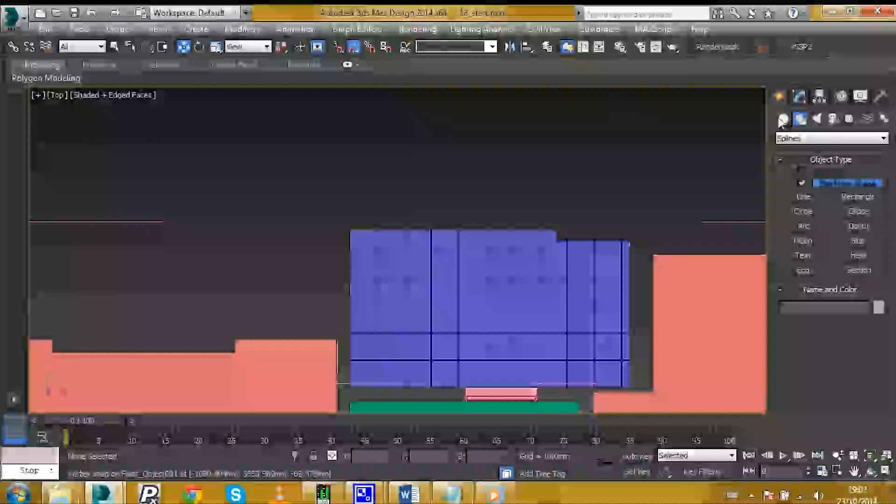So we'll start off by creating a box. So I'll just create a box in here, around about 670 in length, maybe about 1.5 meters in width, and we'll make it about 900 in height. Something like that.

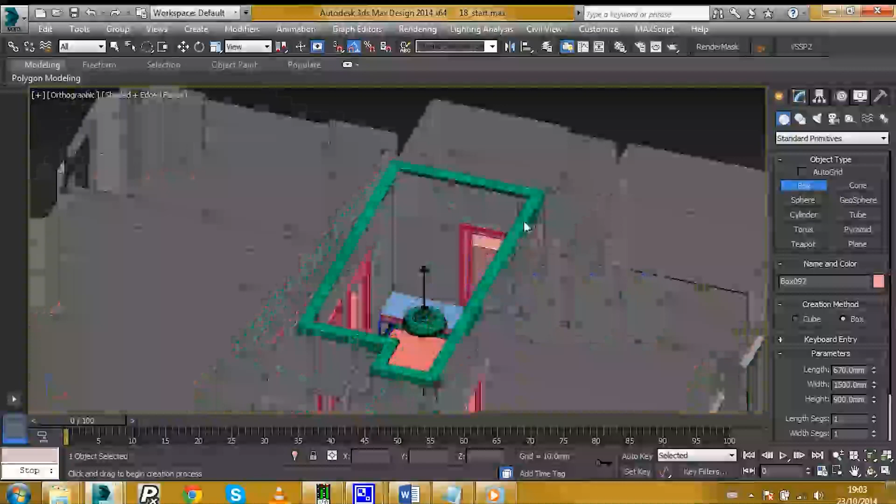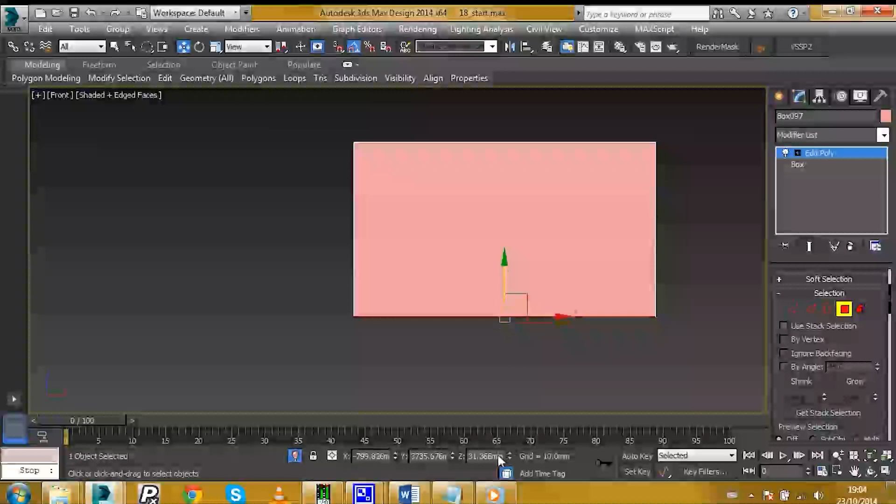So we'll just isolate this, and we'll apply an edit poly, and select polygon. I'm just going to select the bottom face, and we're just going to move this up around 100. We'll do the same with the top face. Just pull that down about 100 as well.

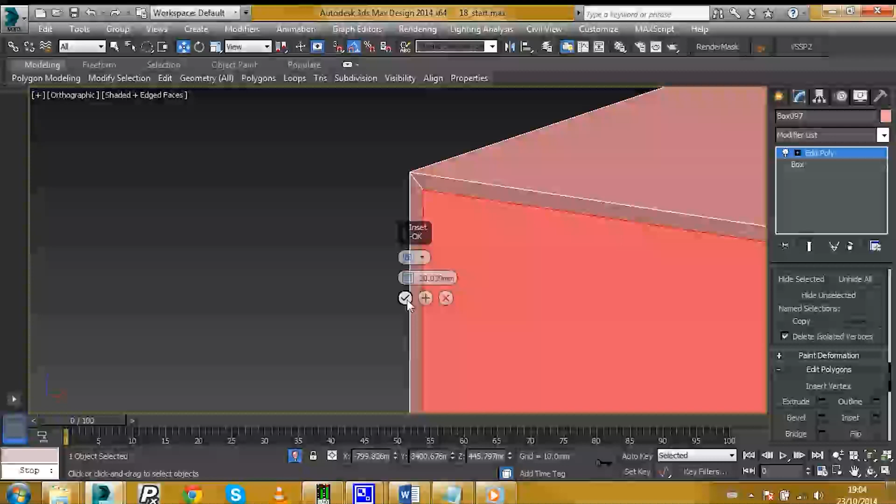On the front face here, if you select this and go to Inset, we'll just inset around 20mm. And if you go to Extrude, we'll extrude this back. Something like this, 600, round about there, will be okay.

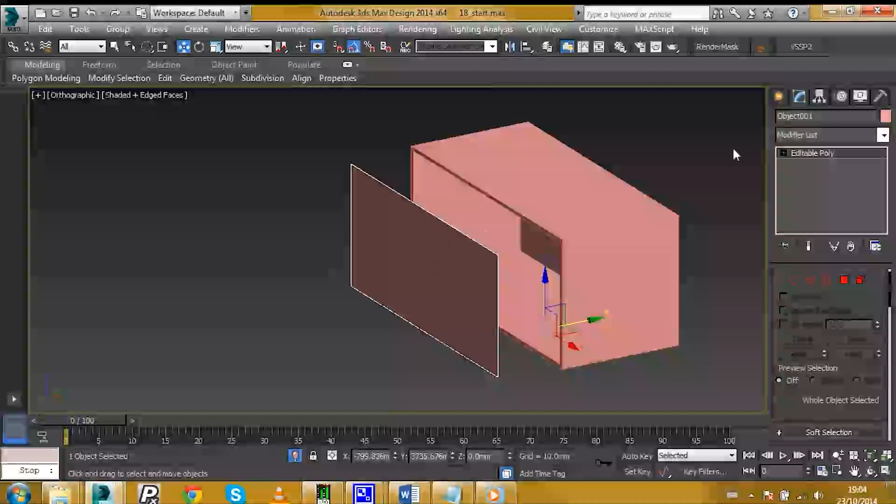So now with this face selected, just shift and drag on the Y-axis to detach it, so clone to object. We'll just select this shape, put the pivot to the centre, hierarchy, affect pivot only, center to object. And under the edit poly, select edge. We'll select the two horizontal edges, and we'll go down to connect.

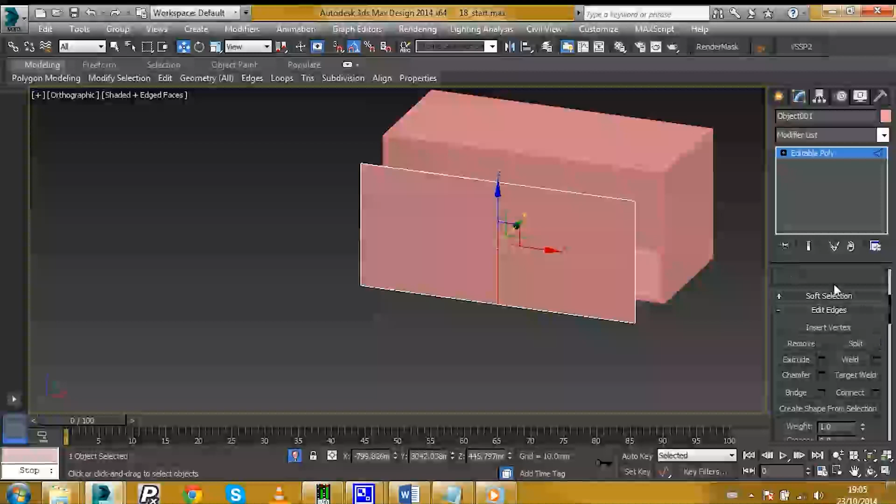We also want to go back to our polygon selection, and with the two faces selected here, go to Inset. At the top here, go to by polygon. So we're going to inset these by polygon. We'll just inset these something around 10 to 12mm.

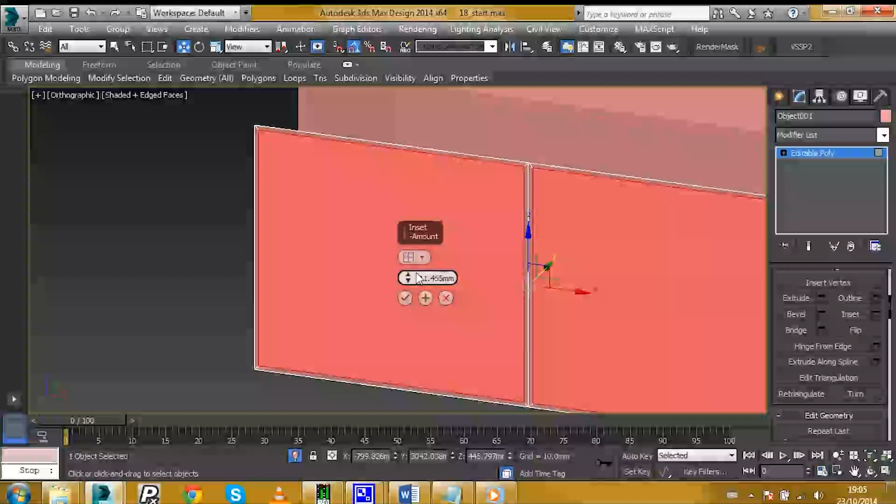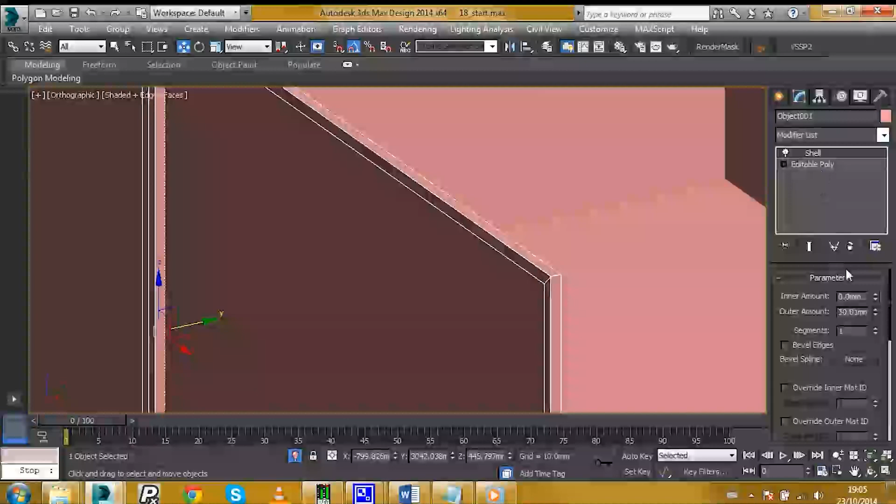And I'm just going to detach these two faces. So edit poly down to detach. Detach them, like so. So with these still selected, we will apply a shell modifier. And we'll just shell these on the outer amount, about 20mm. Like so. That's okay.

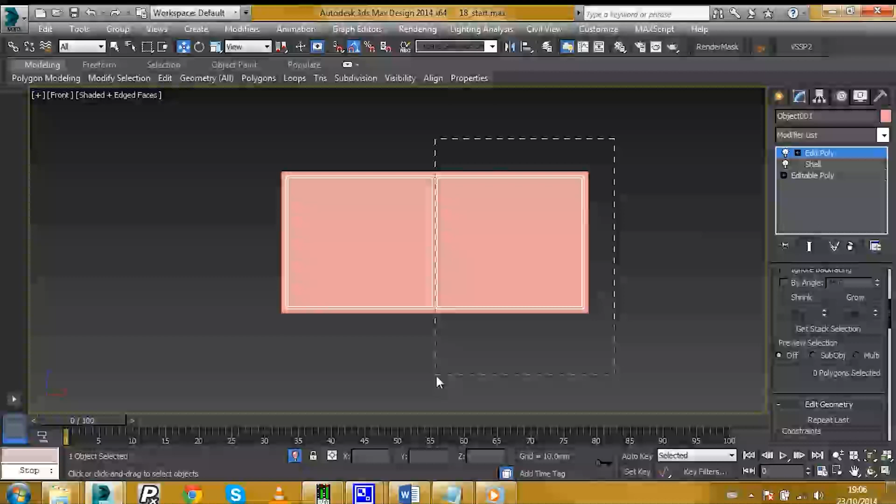So we'll apply an edit poly again. And in your front viewport, I'm going to select half of this. Like so. And just detach this as well. So if you select this object, and we'll put the pivot to the centre, and we'll just move it out of the way.

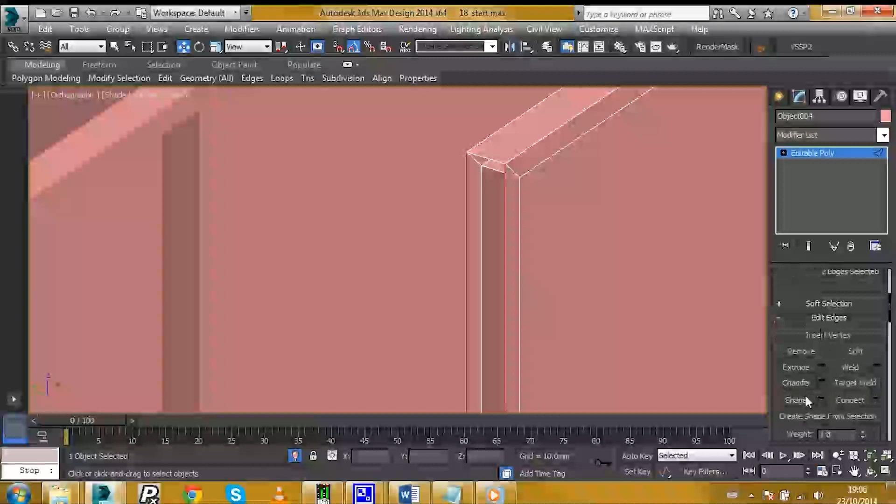We'll be missing a face here, but if we go back to edit poly, we can just bridge these across. So select the two edges and down to bridge. We'll have to do the same on the other piece of geometry. Select the two edges and just hit bridge.

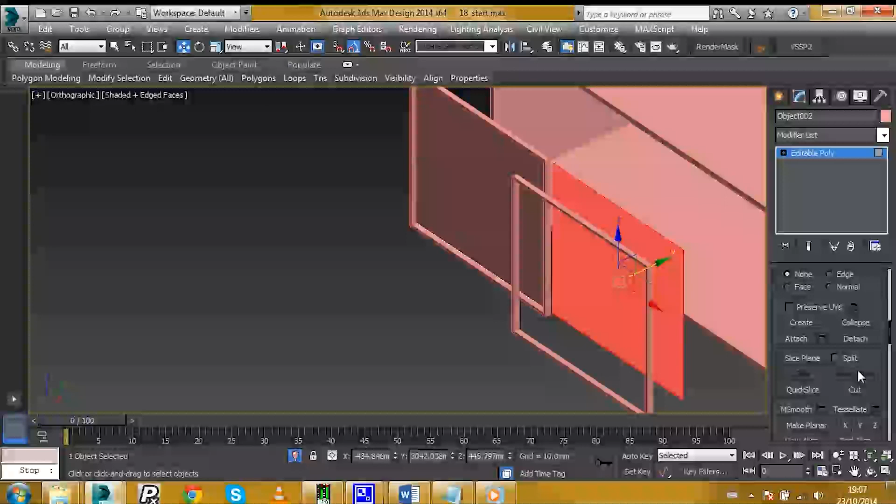So now with these two shapes that we detached earlier, we just want to detach this one. And we'll just move this into the centre of this piece of geometry. And we'll do the exact same with this one. These will be our doors for the cabinet.

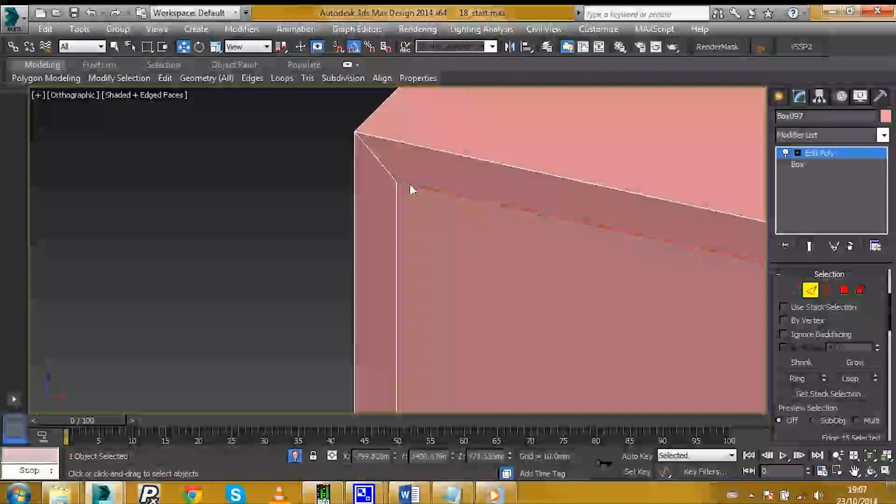So back to the cabinet, just going to chamfer some edges here. So on the inner edge here, we'll just loop our edge selection round, so all the edges are selected, and just chamfer this. 1.5mm is okay. And we'll just do the same on this edge too. So go to chamfer.

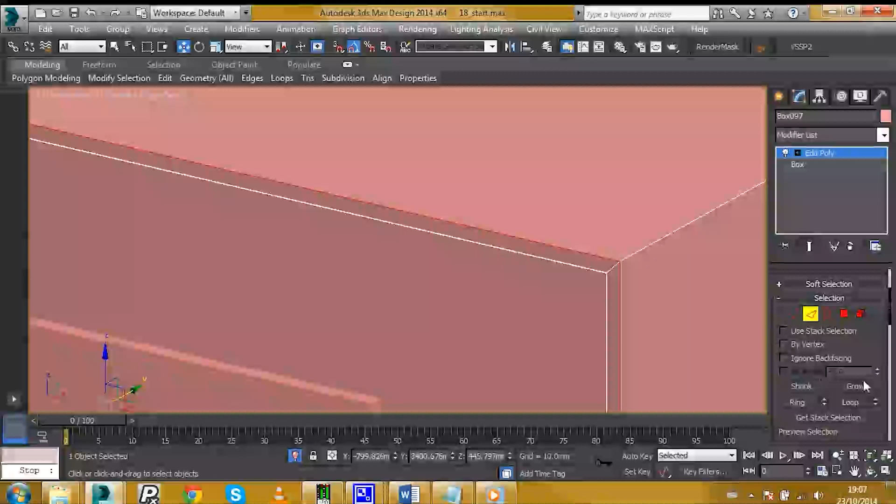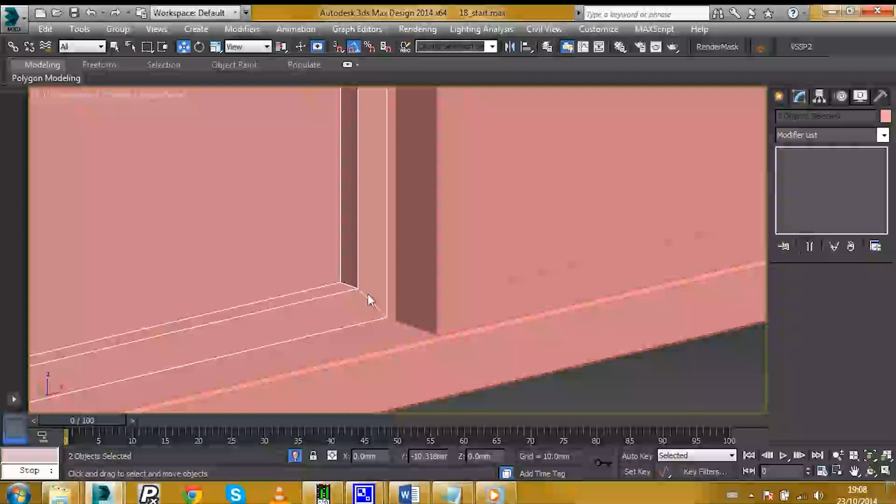Okay, that looks good. So we'll just select one of our doors and we'll move it back into position. Just put it just slightly inside, like so. And with the other door, we'll just pull this further back to give the impression of sliding doors. So you should have something like that.

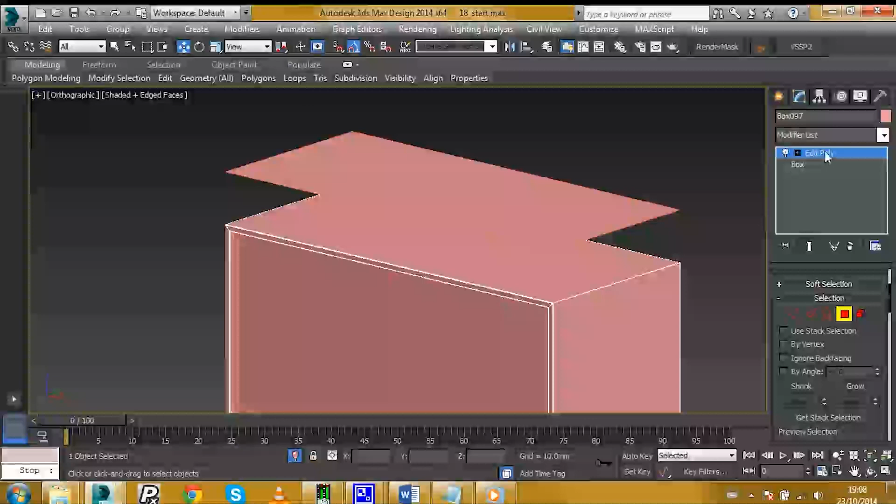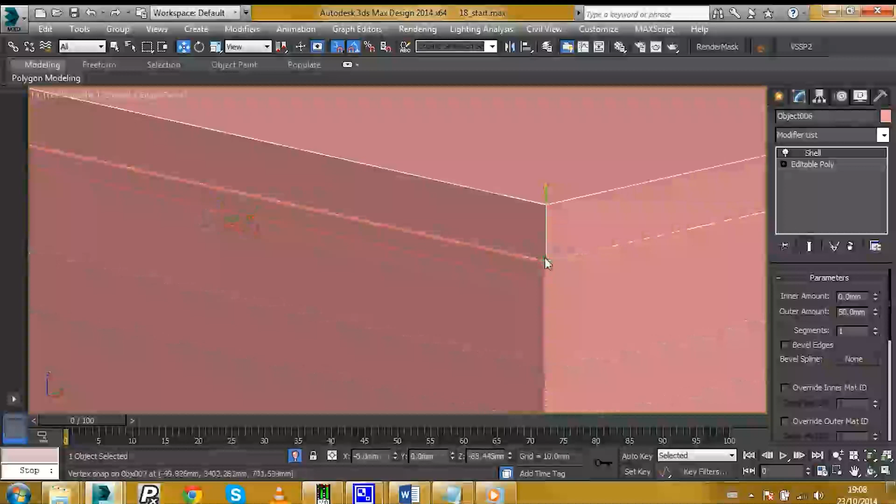So we'll just select our main geometry for the workbench. Select polygon, and we're just going to shift and drag this top face on the Z axis. We'll just clone to object, and it's detached. So again, pivot back to the centre, and we'll apply a shell modifier. So we'll make this around 50mm, just nice and thick, like so, and I'm just going to snap it back down to the top of the bench.

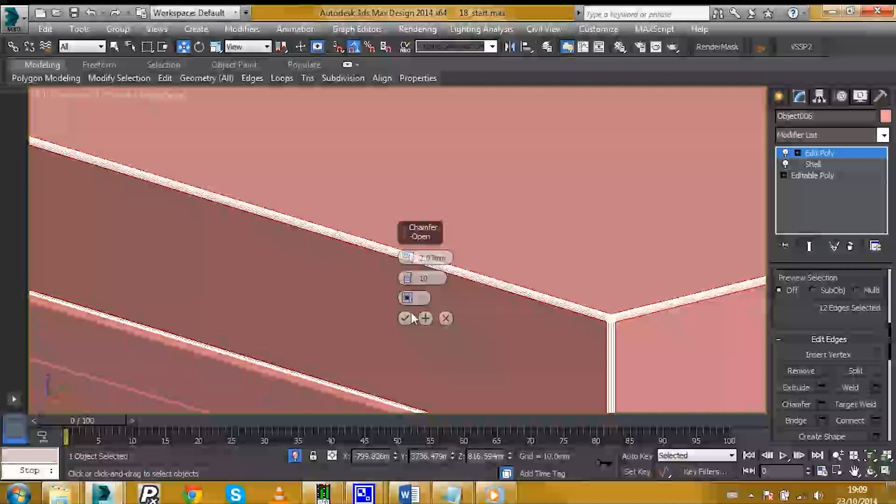So if we apply an edit poly now, and just select all the edges, just going to chamfer these. I'll just add some segments to make them a bit more rounded. And as always, we'll apply a smooth, just auto smooth. That's starting to take shape.

So now if we go to our top viewport, just going to create some small legs for it. So we'll just create a box just in the corner, something around 20 in length, 20 in width. I'll just say about 50 in height. We'll probably adjust this.

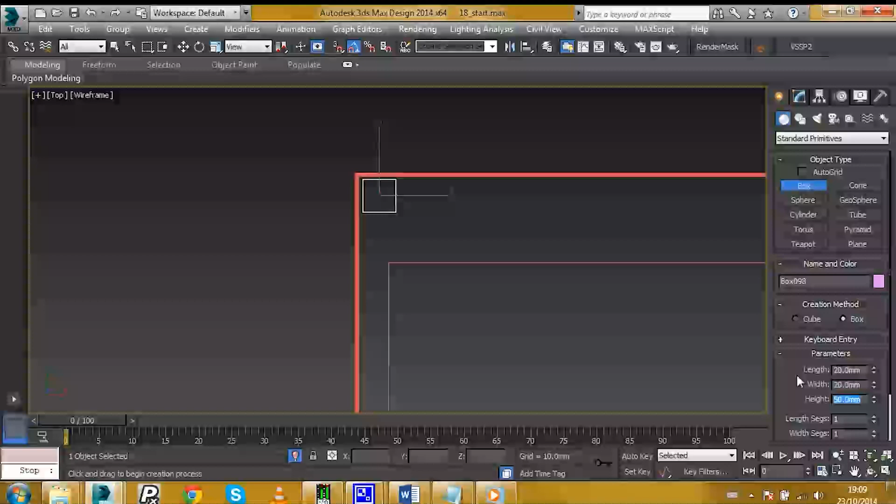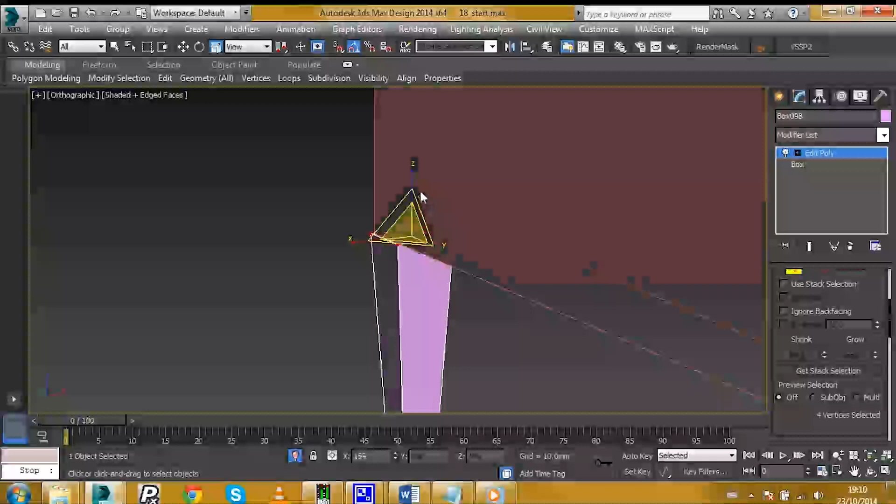Okay, so we'll apply an edit poly, and we'll just pull these vertices up to meet the cabinet. With all these top vertices selected, I'm just going to scale them like so. So move it back in, so it's sitting around about there.

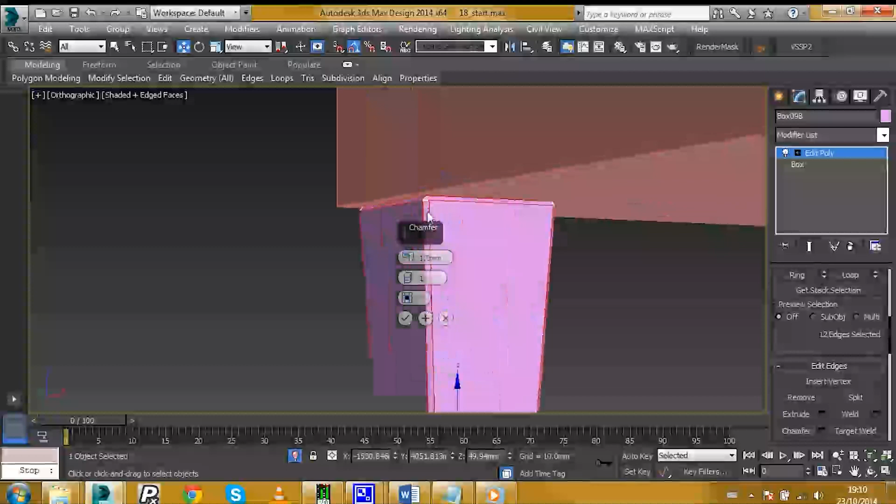So we can now just get our edge selection, select all these edges, we'll go down to chamfer, and just up the segments on the chamfer. I'll just apply a smooth modifier here also, and auto smooth. In the front viewport, I'm just going to copy this across, shift and drag, and we'll just make it an instance.

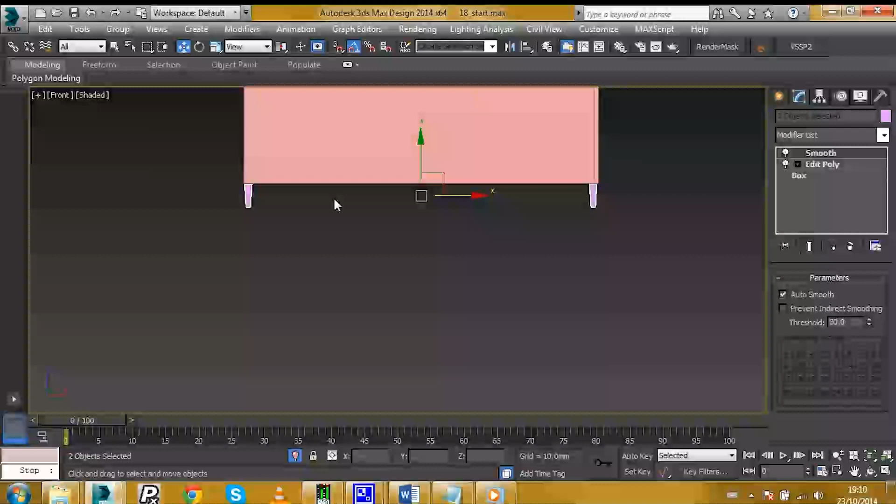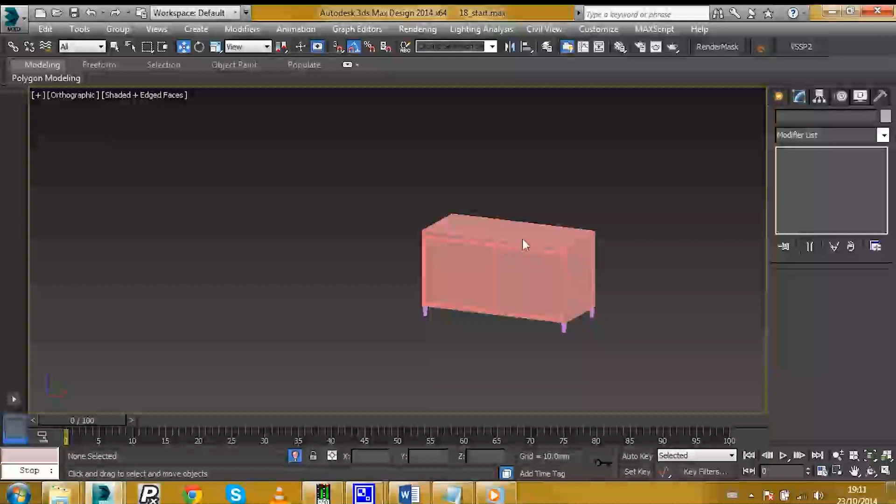And we'll select these two, go to our top viewport, shift and drag on the Y axis, and again just make them an instance. Okay, so that's starting to take shape. Yeah, that looks pretty good. So we'll just end the lesson here, and in the next lesson we'll pick up where we left off and continue modelling the bench and the oven hood.